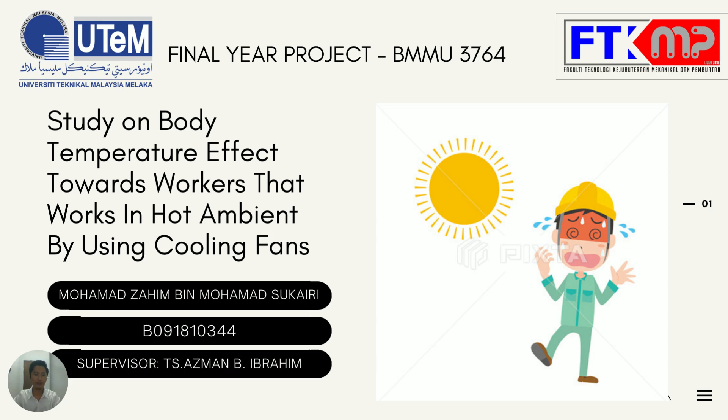Basically, when workers, especially in the outdoor environment industry, are exposed to high temperature, it will affect their performance and focus on the work. In some cases, it may lead to human error, reduction in productivity, and to some extent, it may cause accidents to occur at the workplace.

This is one of the major things I'm trying to minimize: the impact of accidents such as falling objects from height and so on. This already happens a lot in industry, especially in the outdoor environment. So temperature actually plays a significant role in improving human performance.

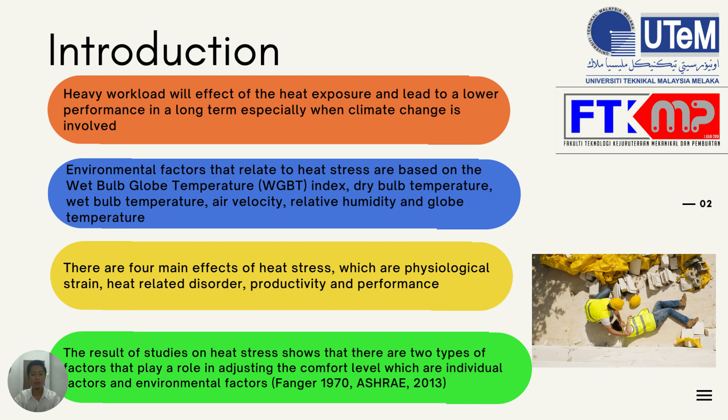So in this particular study, we want to look at workers who work in hot ambient conditions, which puts them at risk of developing severe heat-related illnesses that can lead to fatal incidents.

And of course, the ability to provide comfort is getting more difficult nowadays, which relates to the objective of this study.

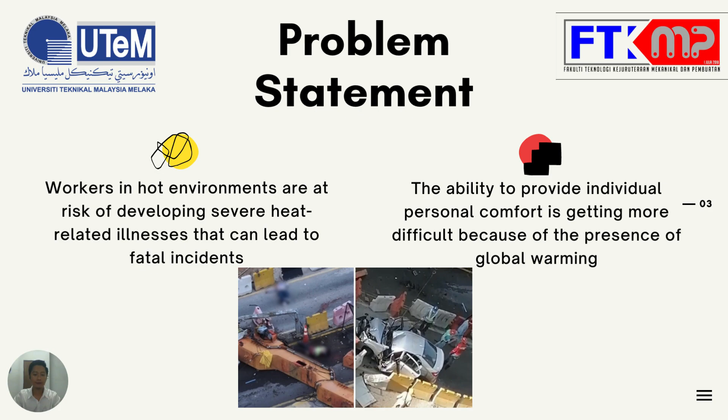The main purpose of this research is to develop an individual personal cooling system using electric fans as the main supply, and using a belt and fabric duct as the conceptual design. I will explain this in more detail in the next slide.

Specifically, this research focuses on studying the effect of long exposure to direct sunlight on body temperature, studying the effect of body temperature with and without the fabric duct fan belt, and fabricating an optimized design concept of the fabric duct fan belt. The scope of this research focuses on the limitations of the project based on the following points.

Firstly, the fabric duct fan belt is only available for 3 to 4 hours of usage using high-speed mode. Second, the fabric duct fan belt is only for outdoor workers who work in a hot and humid environment. And due to the limitation of scope, the fabric duct fan belt is only for workers with a waist circumference ranging from 28 to 40 inches.

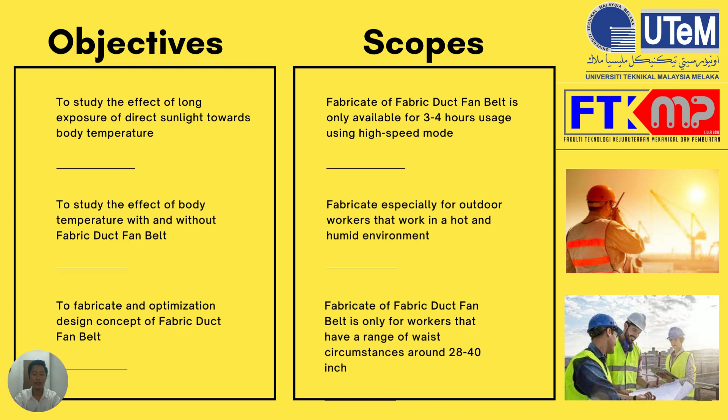We move to the literature review. This research has been studying the hot environment that outdoor workers face during performing a task. The gap of the study is between 2015 and 2021. To summarize, this research consists of human comfort, type of jobs exposed to hot environment, risk of injuries due to heat exposure, measurement parameters, weather temperature in Malaysia, and current innovation.

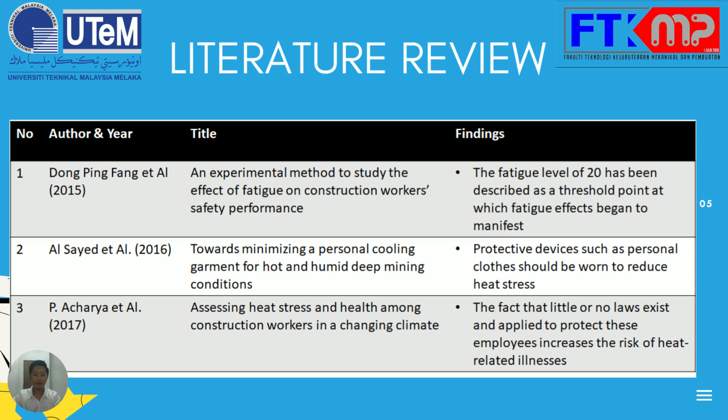After that, it goes to the design comparison, whereby the benchmark, data collection, and concept design are studied in detail. Then this is followed by the final design, where the prototype is made. Next comes design analysis, fabrication testing, and result discussion.

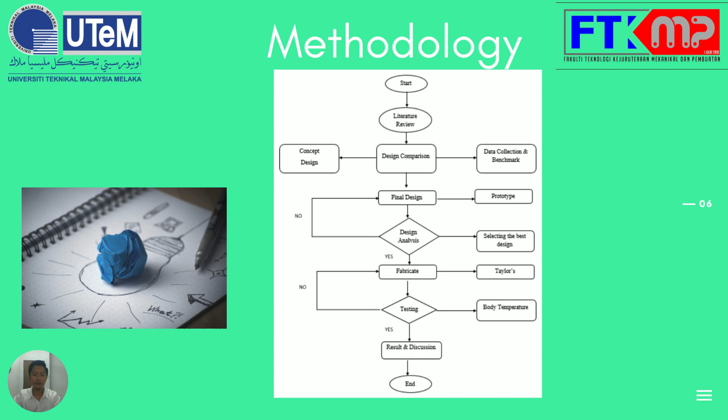In terms of conceptual design, for the first design, the material will use coated cotton fabric on the outside and insulated fabric on the inside. It will use a plastic buckle clip to be tightened at the waist. Since the electric fan has a clip, the product will have a hole added for the supply.

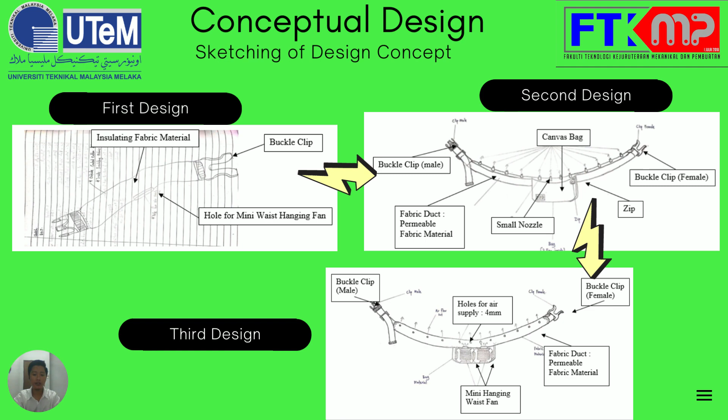In the second design, we'll be using a pouch bag as the conceptual design, with air distribution using a small nozzle. The third design is similar to the second, however air distribution will use a standard hole with a diameter of 4 mm. The difference is the second uses a nozzle and the third does not use a nozzle.

In terms of fabricating, we will use Shopee online shop as the supply medium to fabricate the product. For material selection, we'll be using permeable fabric material, which is flexible, breathable, pressure-care, waterproof, and windproof.

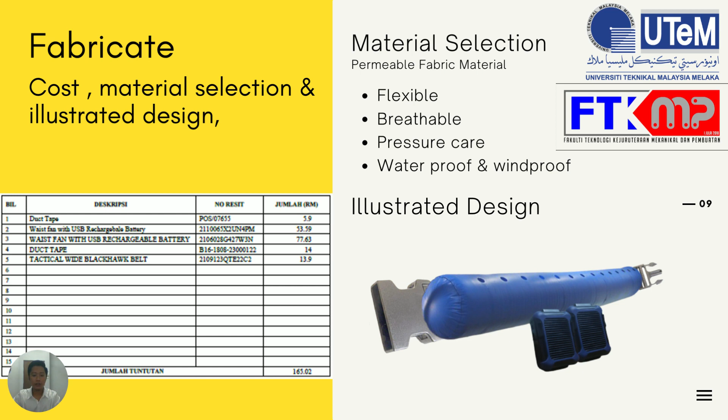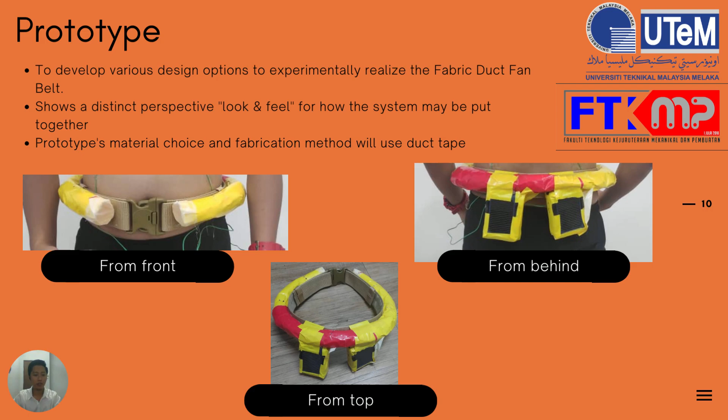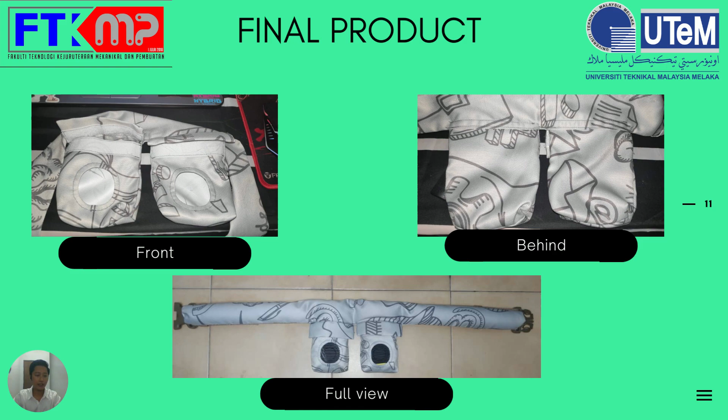For the final product, we used permeable fabric sponsored by Prehoda Malaysia Sdn Bhd. For the sewing part, we sent it to the tailors. This is the front side, this is the back side, and this is the full view of the fabric duct fan belt.

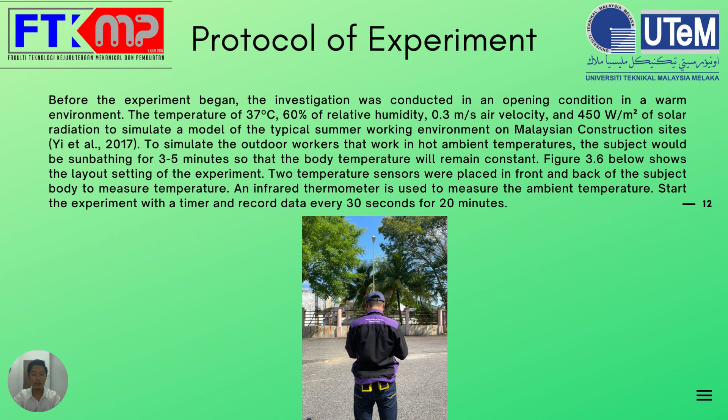We go to the result and discussion. For selecting the best design, there will be 5 experiments: Experiment 1 with 5 holes, Experiment 2 with 10 holes, Experiment 3 with 15 holes, Experiment 4 with 20 holes, and Experiment 5 with 25 holes.

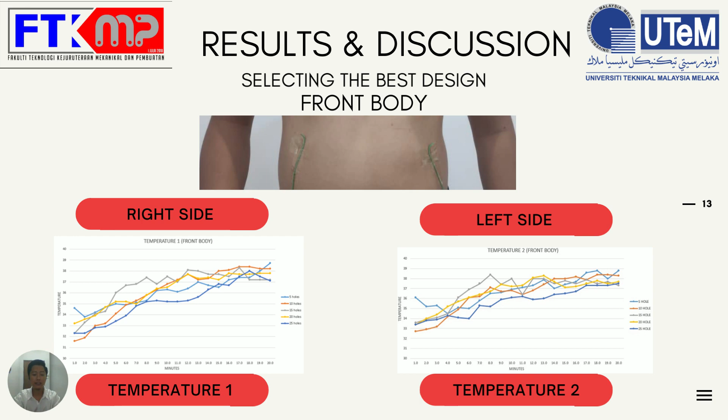For temperature 2, the sensor was placed at the front of the body on the left side. For hole 25, the temperature began to be constant from minute 9 until minute 16. The temperature is between 35.9 degrees Celsius to 36.7 degrees Celsius.

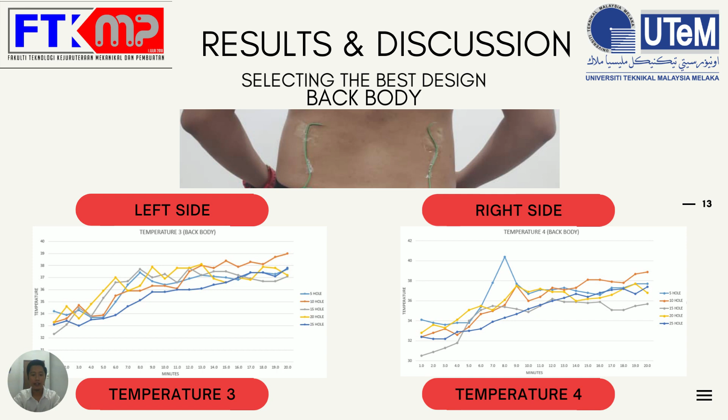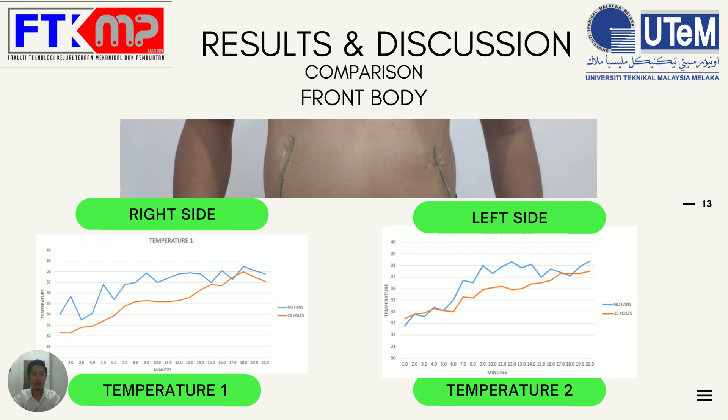We move to the comparison section. It represents the comparison between non-fan and with fabric duct fan belt with 25 holes. Orange indicates 25 holes and blue indicates non-fan. It can be noticed that the body temperature at the front is higher and uneven before using the fabric duct fan belt. After using the fabric duct fan belt, the temperature decreased drastically. This shows that the front body gets enough airflow after using the fabric duct fan belt.

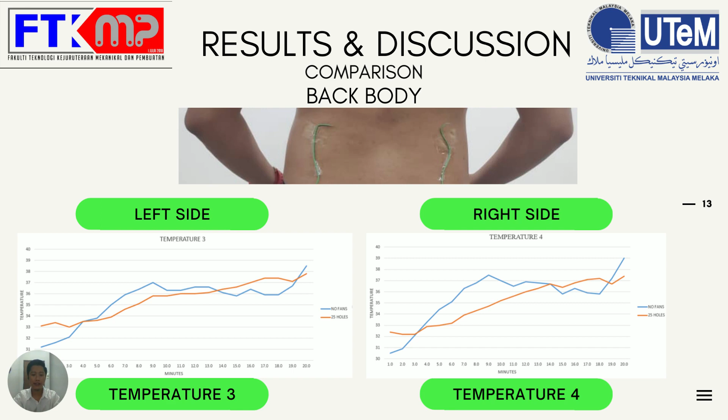So this is the result for temperature 3 and temperature 4. To summarize, the temperature for both is consistent, but notice that it is higher before than after using the fabric duct fan belt.

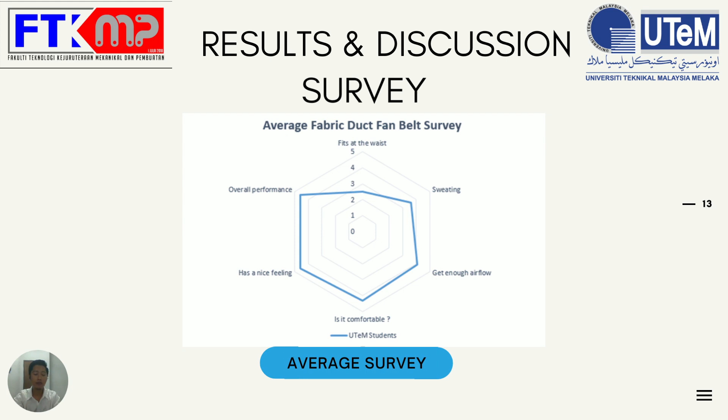As a conclusion, the effect of prolonged exposure to direct sunlight on body temperature has been investigated. The body temperature will increase along with time. Heat can be lost if the skin temperature is higher than the ambient temperature. The result from the analysis proved that continuous airflow circulating the body can reduce and maintain body temperature.

In terms of shape, this research used a C-shape to balance the airflow to the body; however, the shape cannot be straight. The minimum number of holes for the fabric duct fan belt is 25. If less than 25 holes, the temperature will rise and thus not be in a control condition.